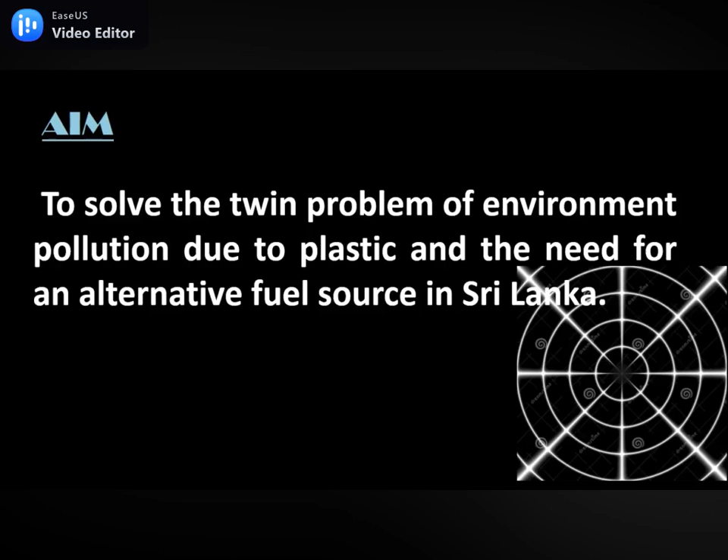The aim of my research is to solve the twin problem of environmental pollution due to plastic and the need for an alternative fuel source in Sri Lanka. These are the key words of my aim: environmental pollution due to plastic, and need for an alternative fuel source.

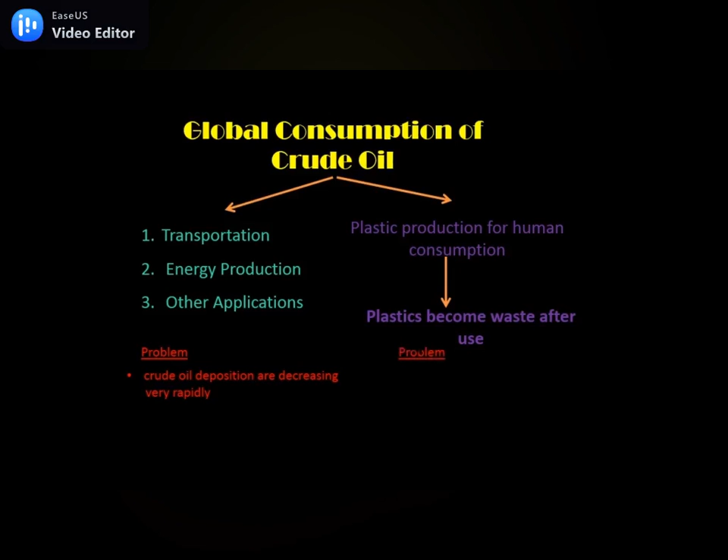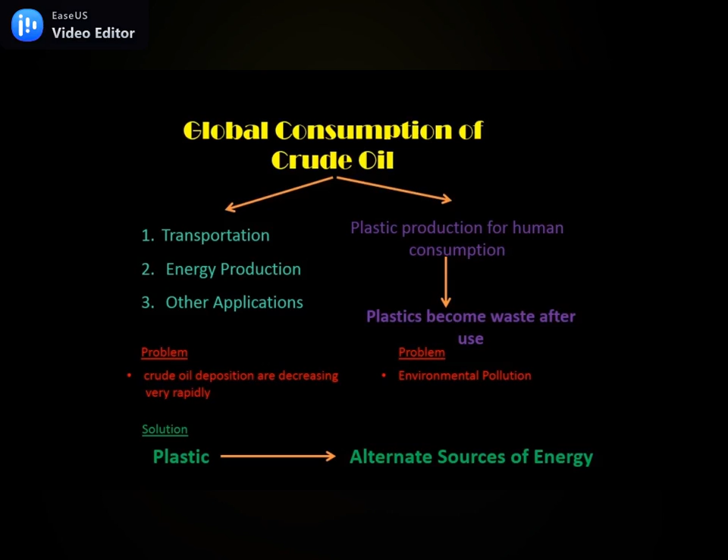On the other hand, crude oil is used to produce plastic for human consumption. Plastic becomes waste after it is used, so waste plastic has become one of the major reasons for environmental pollution. Through my research, I am trying to give a solution for these two problems by converting waste plastic into a usable fuel source.

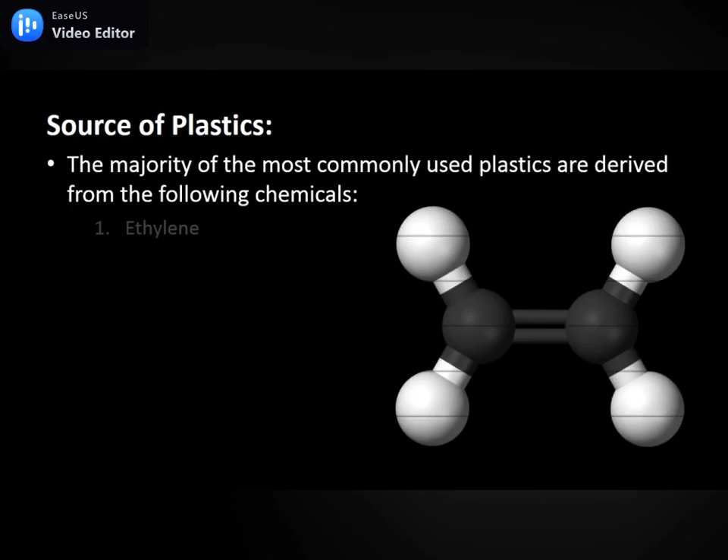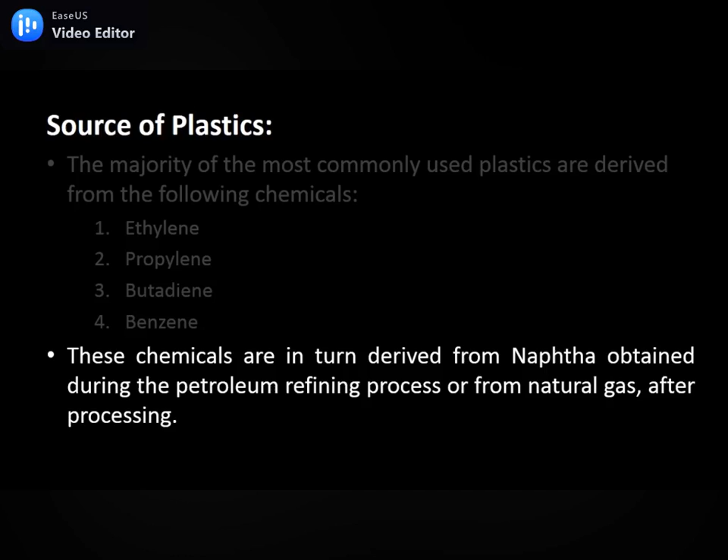Sources of plastic: the majority of most commonly used plastics are derived from the following chemicals: ethylene, propylene, butadiene, and benzene. These chemicals are in turn derived from naphtha obtained during the petroleum refining process.

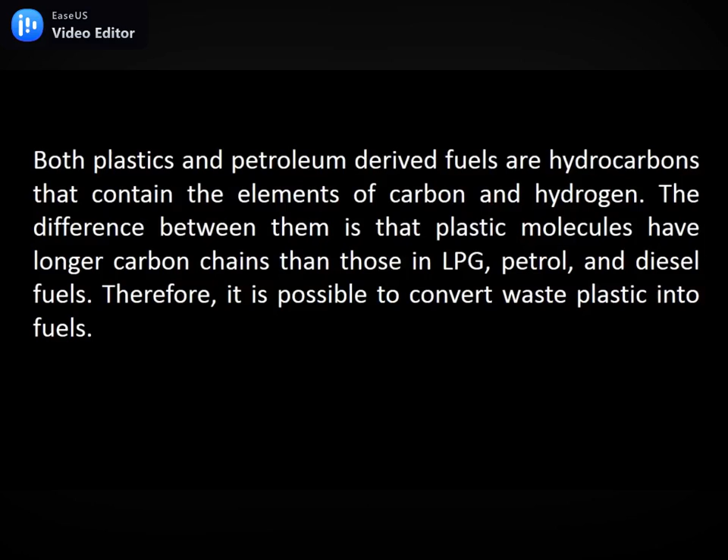Both plastic and petroleum-derived fuel are hydrocarbons that contain the elements carbon and hydrogen. The difference between them is that plastic molecules have longer carbon chains than those in LPG, petrol and diesel fuel. Therefore, it is possible to convert waste plastic into a fuel.

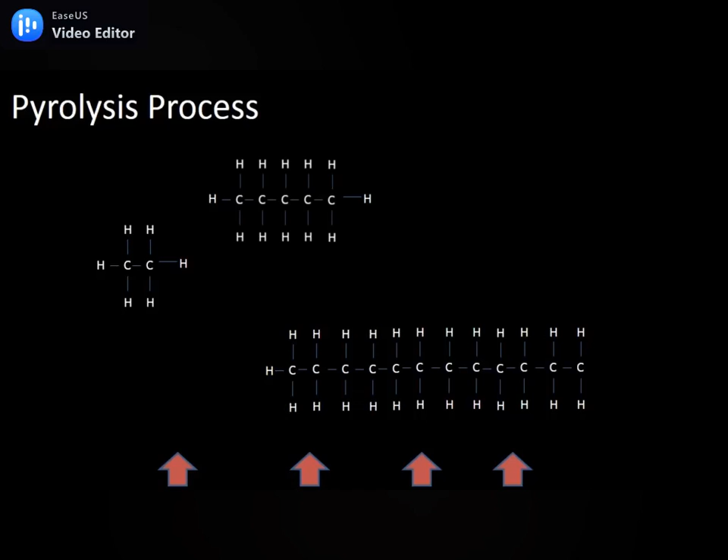By adopting chemical processes such as pyrolysis, waste plastic can be safely converted into hydrocarbons that can be used to produce fuel for transportation. When the cracking temperature is achieved, the long carbon chains break into small carbon chains.

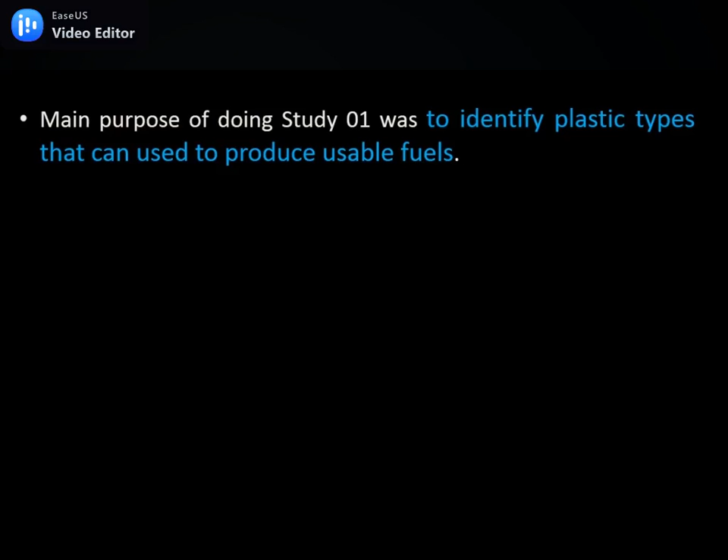Case study 1. The main purpose of doing case study 1 was to identify the plastic types that can be used to produce usable fuel. Following 6 phases were adopted for the execution of study 1.

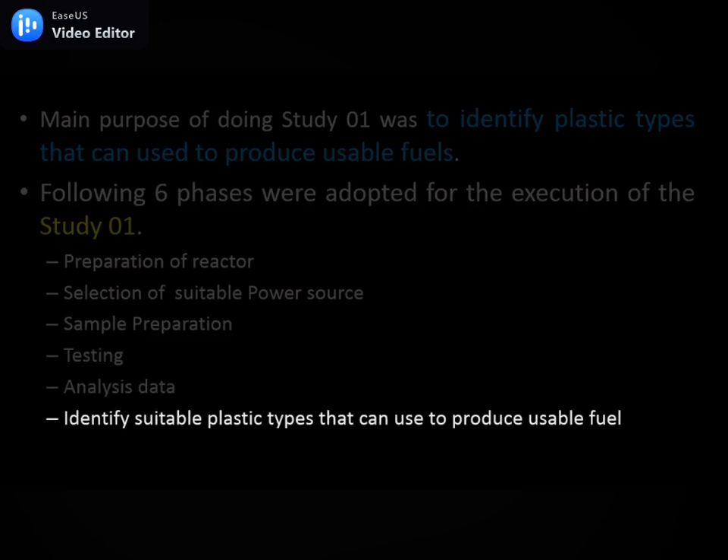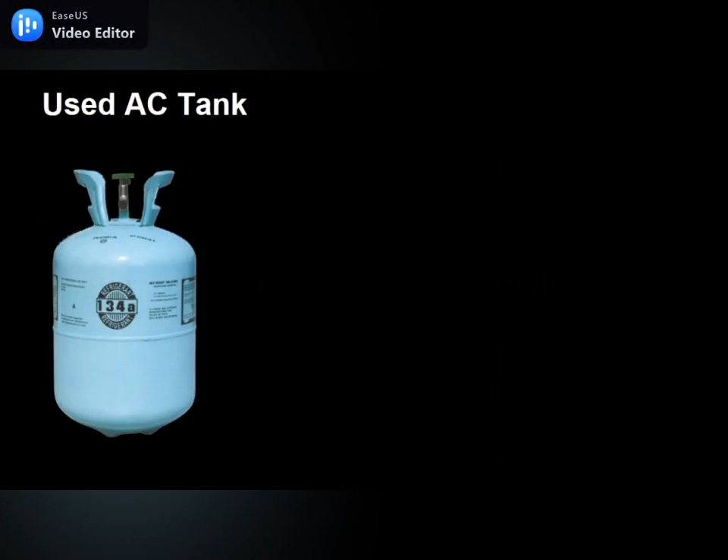Preparation of reactor: an empty AC gas container was used to produce the reactor. Several changes were done to the empty container when it was converted to the reactor, as shown in the figure. Due to the higher functionality of the reactor, there was no sufficient cooling from the natural air, so to overcome this problem, an extra cooling system operated by water was added to the system.

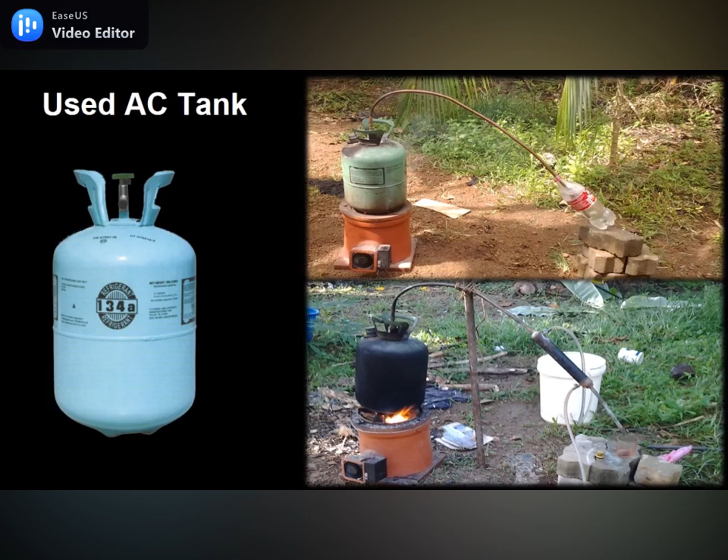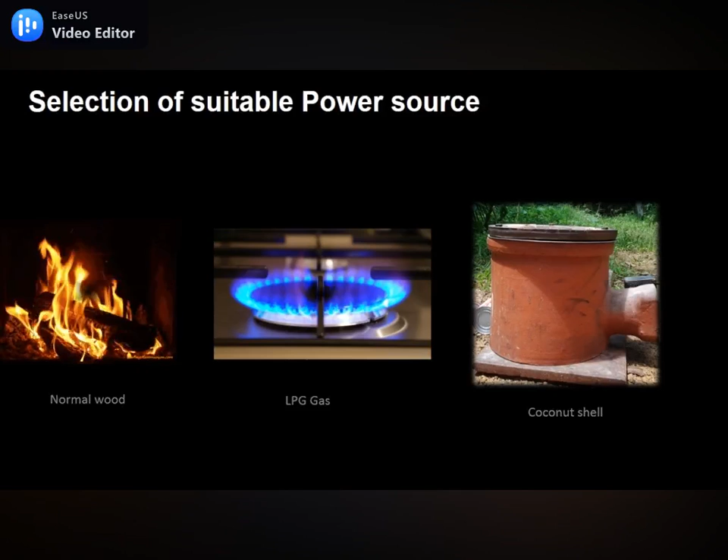Selection of suitable power source: several power sources were tested to identify the most suitable one. During testing, it was observed that normal wood and LPG gas failed to provide the required temperature for plastic cracking, while coconut shells were able to provide the required temperature.

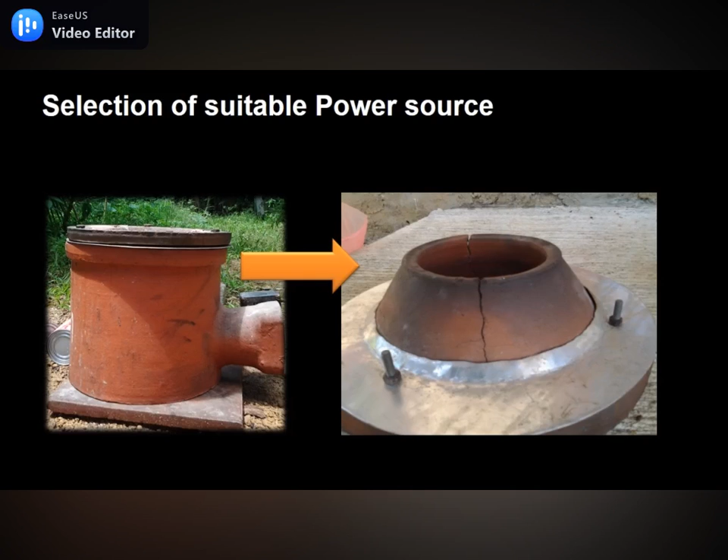Hence, a pottery-type kiln was used for power generation for the pyrolysis unit. However, it was unable to perform as is because the clay body of the kiln cracked when higher heat was applied. Therefore, to avoid this, an aluminium plate was attached to the body, which restricted further cracking.

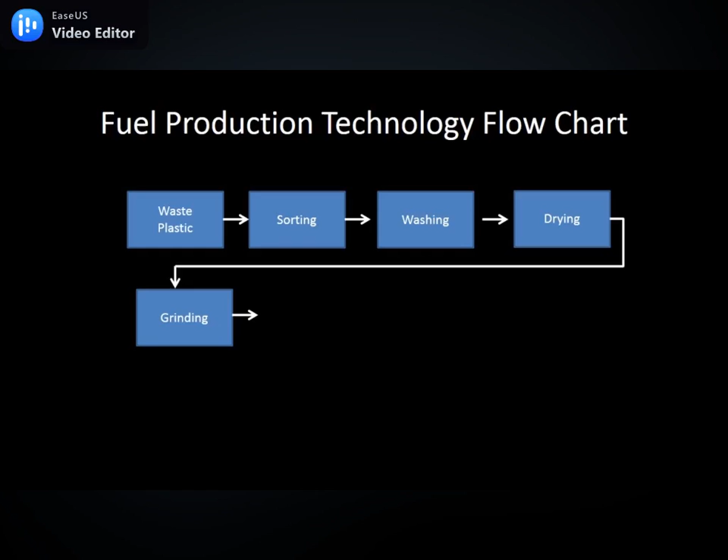The fuel production technology flowchart: first, separate the waste plastic from the landfills. Separate the plastic according to type. Wash the plastic to remove other waste substances attached to it. Dry to remove the water. Cut into small particles. Carry out the pyrolysis process. Store and receive fuels, then the stored fuel can be used.

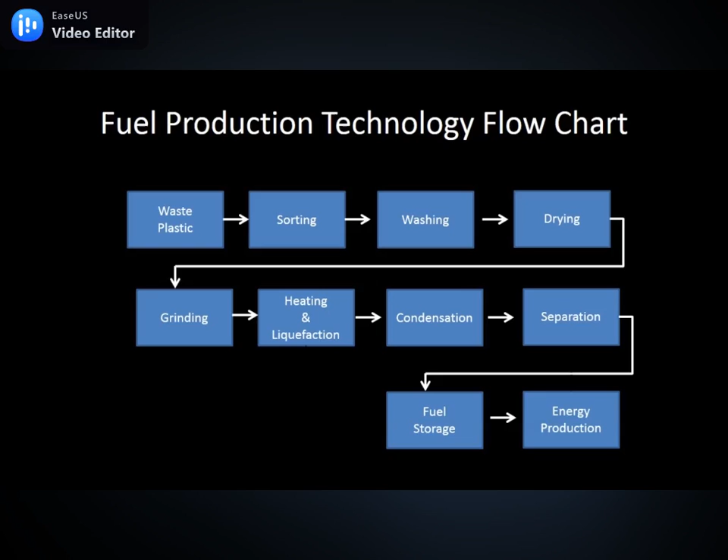Energy results: the numerical values are not very important at this stage, but this is the result, using a 500 gram plastic sample.

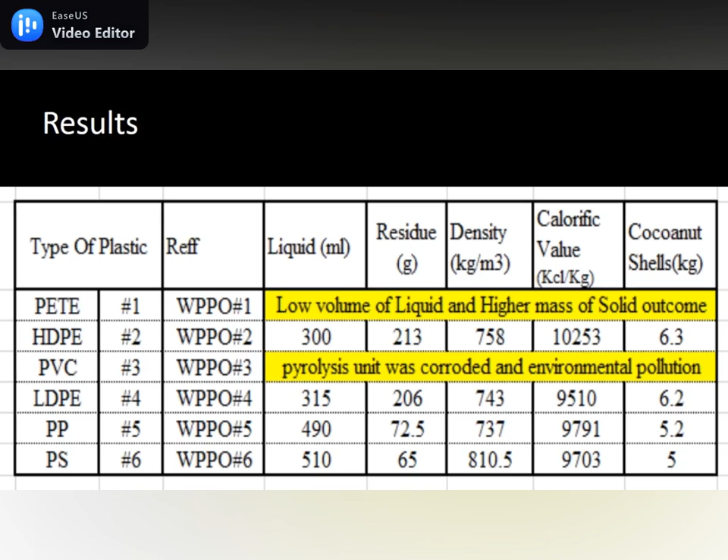The main purpose of carrying out study 1 was to identify the plastic type that can be used to produce usable fuel. There were 6 types of plastic undergoing testing. According to the observation, PETE and PVC were not suitable to produce fuel.

Therefore, according to the results observed, HDPE, LDPE, PP and PS plastic types were able to be converted to fuel successfully through the pyrolysis process.

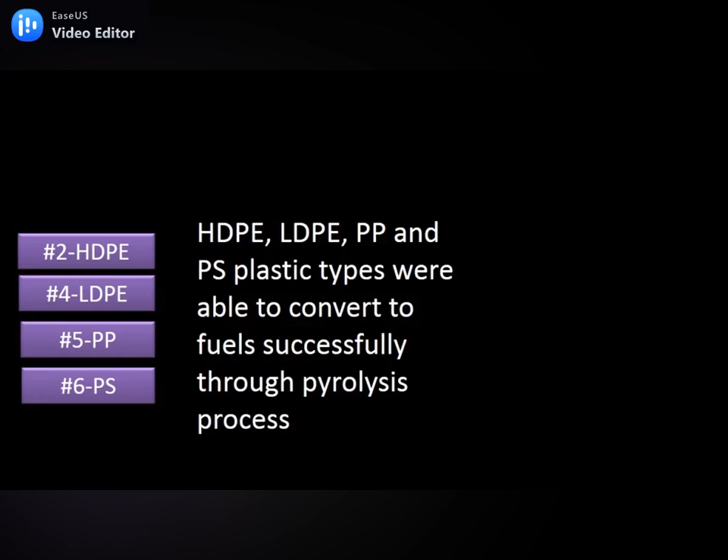Case study 2: usually waste plastic is available at waste dump sites as a mixture, so it can be separated according to plastic type and then pyrolysis can be carried out one by one, as done in case study 1. This is called method 1. Pyrolysis process can also be done for the mixture, except for PVC and PETE. This is called method 2.

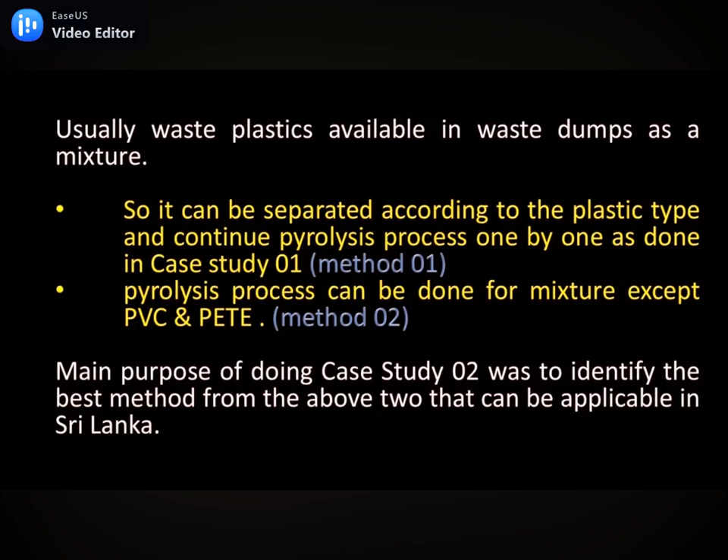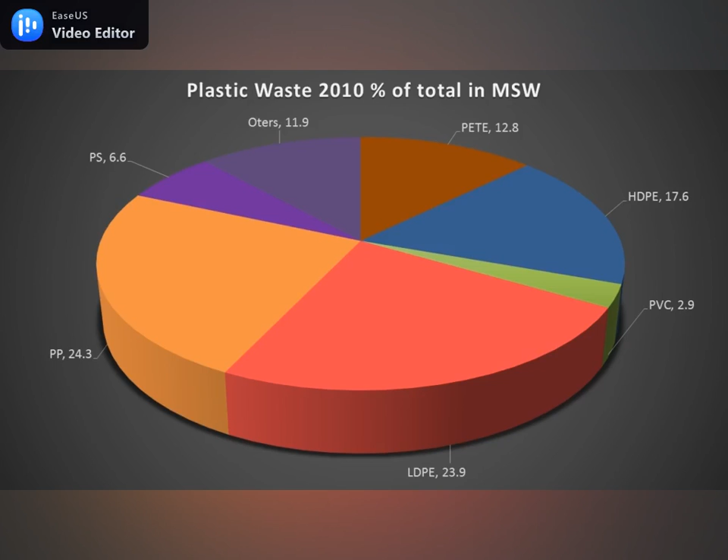The main purpose of doing case study 2 was to identify the best method from the above two that can be applicable in Sri Lanka. Several researchers have studied available waste plastic composition in waste dump sites; however, unfortunately, there is no research related to Sri Lanka specifically. As an option, Asian plastic waste composition data was used to prepare the mixture sample.

According to the study, using PVC and PETE for pyrolysis is unsuitable. So PVC, PETE and others were removed from the raw waste plastic sample before preparing the waste plastic mixture for pyrolysis.

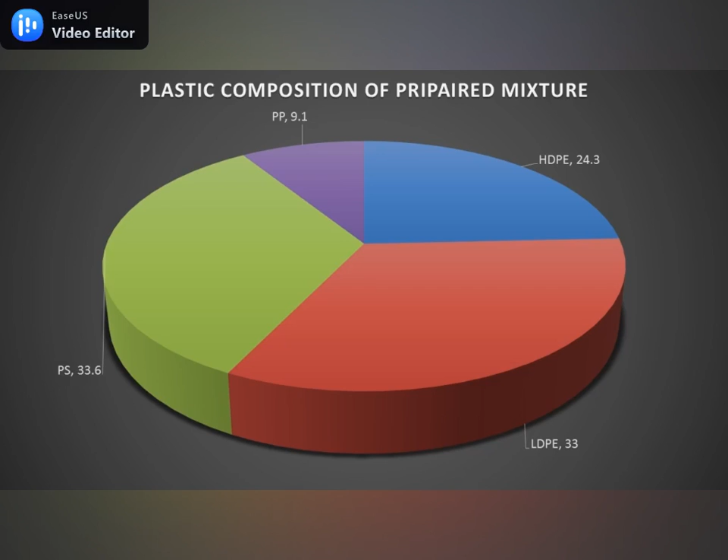Therefore, the composition of the two plastic mixtures changes according to this figure, which can undergo pyrolysis. HDPE, LDPE, PP, and PS waste plastics were separated from the waste plastic raw material. A 500 gram sample mixture of plastic was prepared using this table, which was based on the given graph.

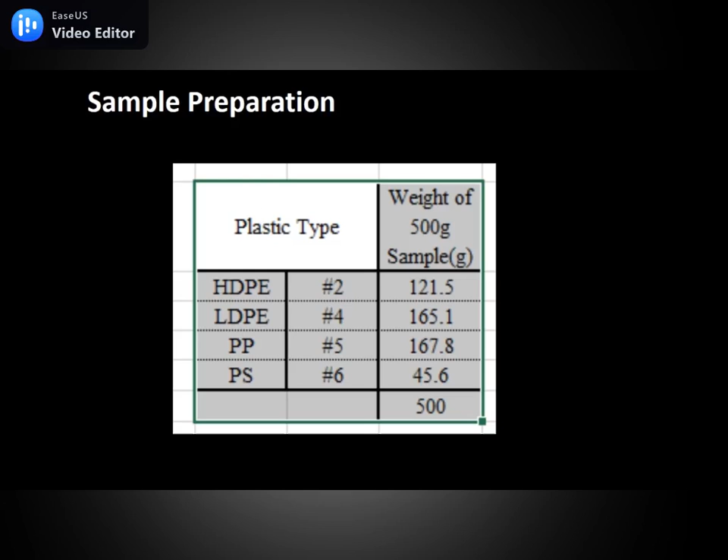15.5%, and 6.3 kilograms of coconut shell were spent for fire generation.

By using 500 grams of mixture, we can get an output of 460 milliliters of liquid fuel, WPPOM, and 70 grams of residue.

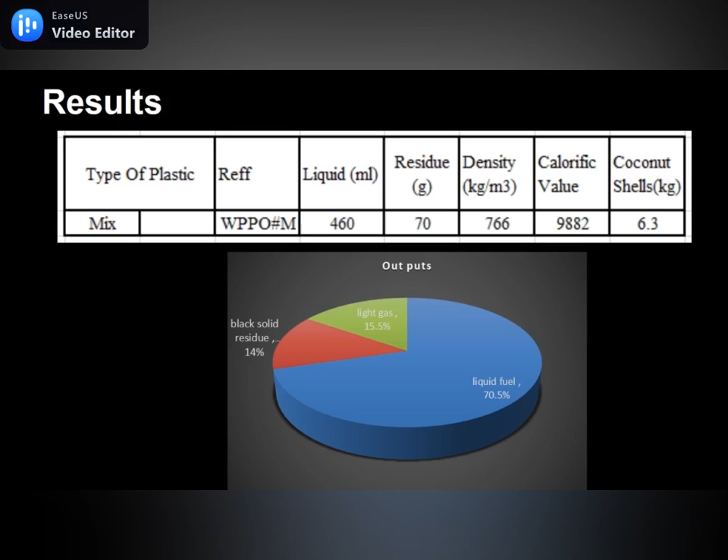The following factors were considered to identify the best option: produced liquid quantity, produced residue quantity, produced energy, and required energy for cracking.

Case study 3. The main purpose of the study was to identify available fuel types which can be compared to the

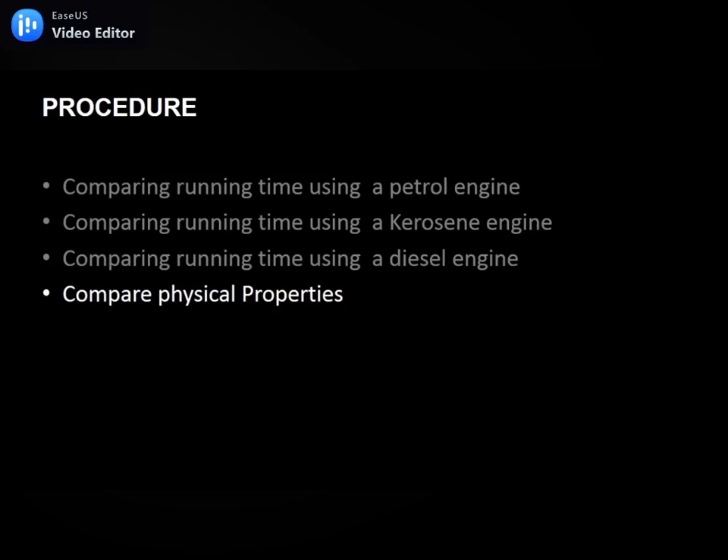WPPOM renewable fuel procedure: comparing running time using a petrol engine, comparing running time using a kerosene engine, comparing running time using a diesel engine, and comparing physical properties. Three types of engines - petrol, kerosene and diesel - were used to conduct these tests: a 50cc 2-stroke petrol engine, a 4.2 horsepower Kubota kerosene engine, and a 5 horsepower Petter diesel engine.

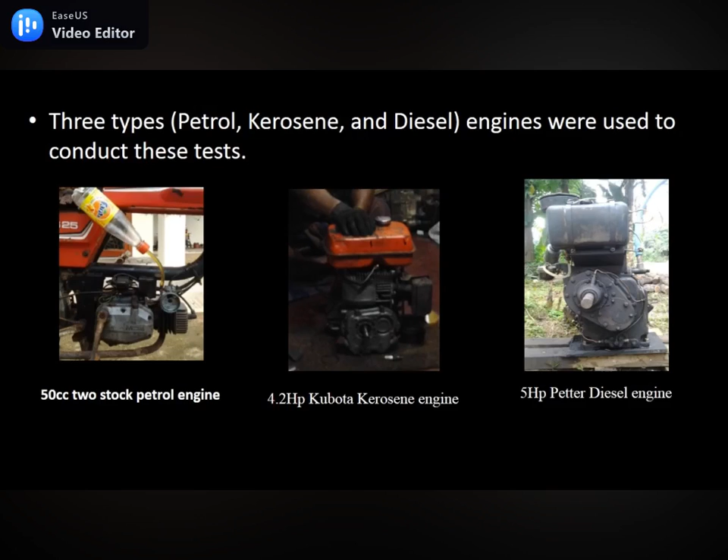Physical properties were also much different compared with the other fuels.

WPPOM is not suitable for use in a petrol engine, as the petrol engine was unable to start using WPPOM.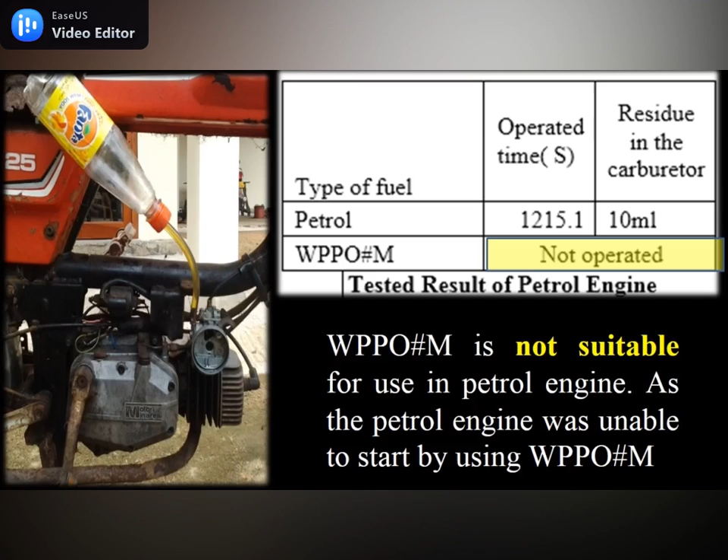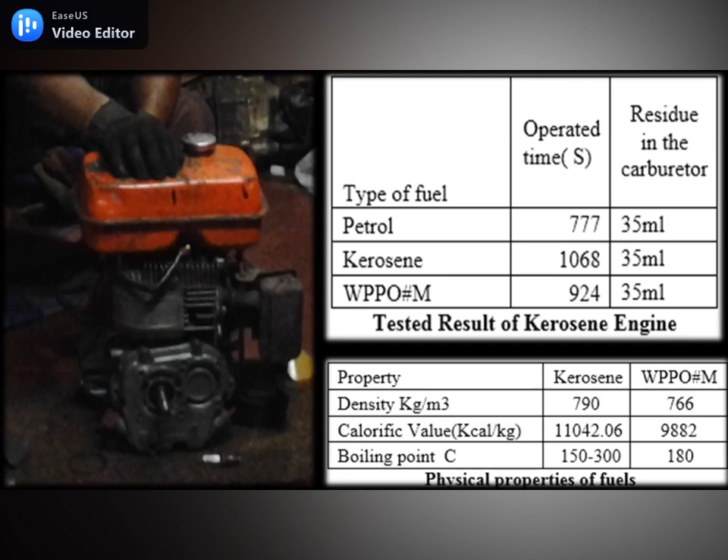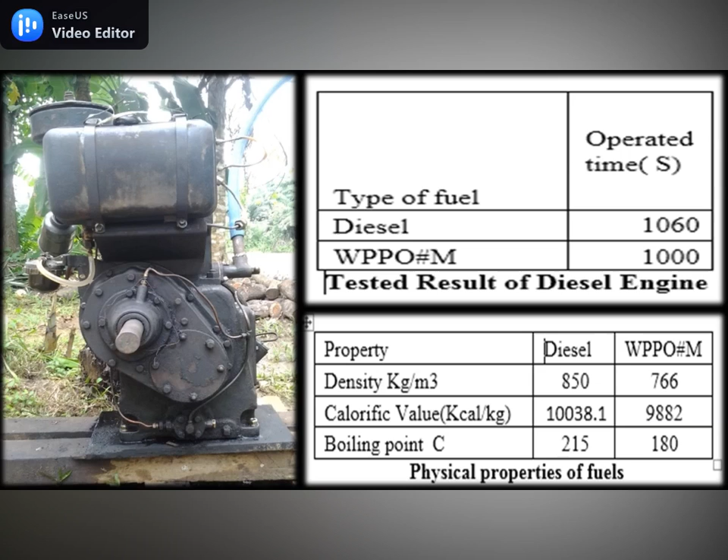It was possible to use WPPOM in a diesel engine, even though it did not give 100% performance compared to diesel. Calculated efficiency of WPPOM in the diesel engine was about 94%. In addition, the physical properties were also not very different from diesel.

The main purpose of study 4 was to identify the application of WPPOM in Sri Lanka.

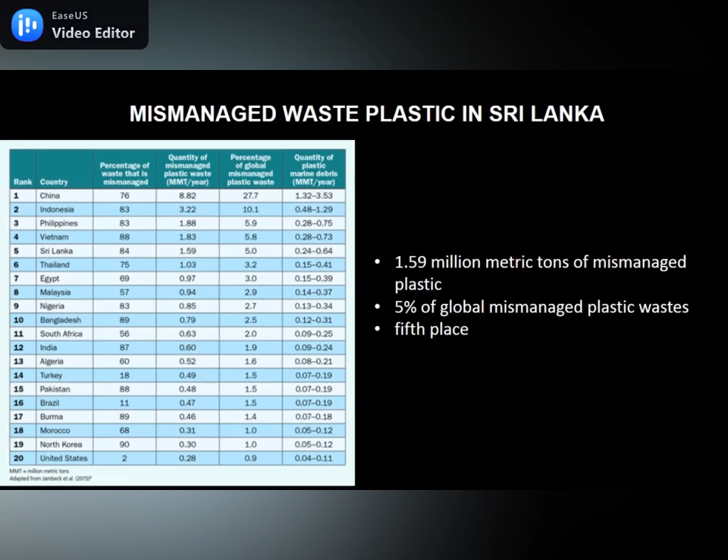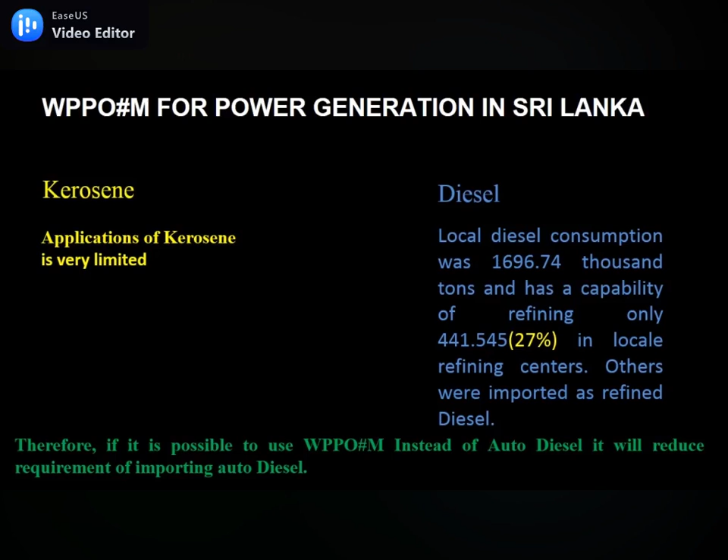It will reduce the requirement of imported diesel. 1.59 million metric tons of mismanaged waste plastic were available in Sri Lanka's waste dump sites. According to the study, 72.4% of waste plastic was able to undergo the pyrolysis process.

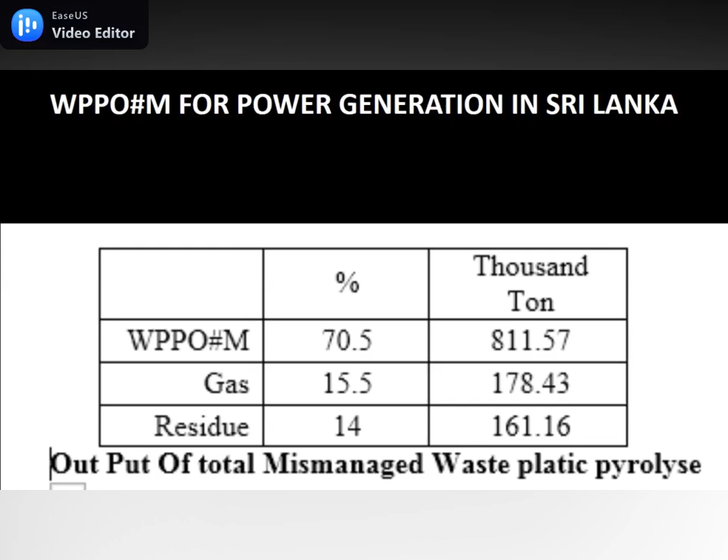The table shows the capability of waste plastic transferred into usable fuel. That means WPPOM: 811.57 thousand tons, gas: 178.43 thousand tons, residue: 161.16 thousand tons.

Auto diesel consumption - according to the chart, 811.57 thousand tons of WPPOM can be produced using 1.59 million metric tons of mismanaged plastic. This was approximately 47% of total auto diesel consumption in Sri Lanka and 67% of total imported diesel.

By doing that, it is possible to reduce imported auto diesel from 1199.17 thousand tons down to 387.6 thousand tons.

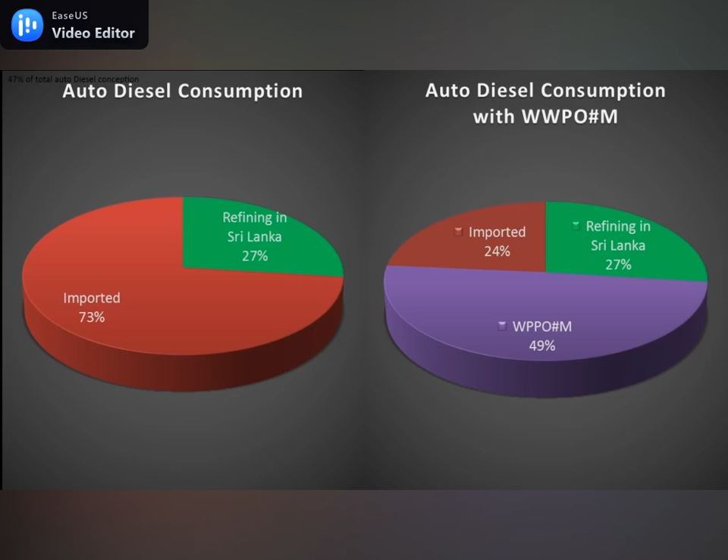178.43 thousand tons of light gas was produced when generating WPPOM. In addition, it was observed that the gas was capable of igniting during testing. The technology for collecting gas is a little costly, so the gas was unable to be tested in this research.

However, if it becomes capable of being used instead of LP gas, it will recover 96% of annual LP gas consumption.

According to this study, 27.22% of plastic waste was unable to be used for the pyrolysis process. In addition, study 2 confirmed 14% of residue was generated by the pyrolysis.